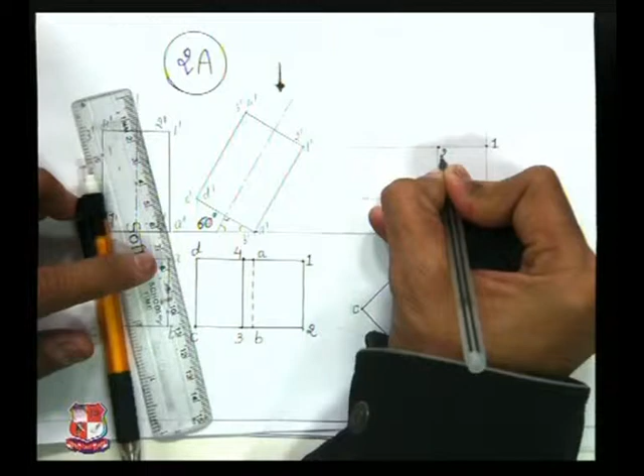For point number 3, from 3 draw a straight vertical line, that is the projection line from point 3, and from point 3 dash a horizontal line. So here is point number 3. Similarly, point number 4, vertical line from point number 4, which is over here like this, and horizontal line from point 4 dash, that is 4, in the front view.

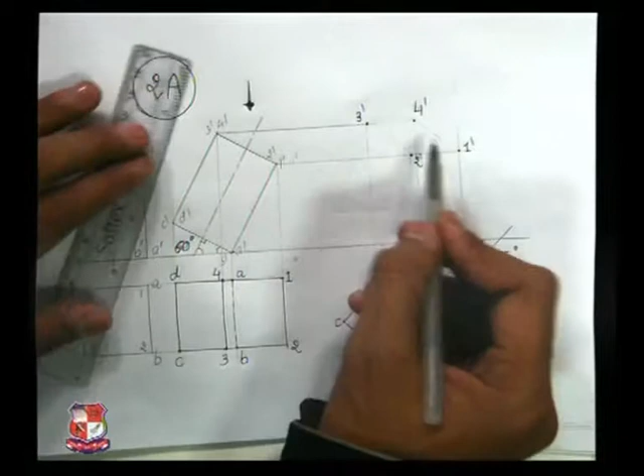Mark dash points over here. And if we are looking from here, the 1 2 3 4 face is visible. Again, the 2 point is towards us, so it would be visible. Hence this 1 2 3 4, or 1 dash 2 dash 3 dash 4 dash, would be fully visible. That we join with the full line like this. That is 1 dash 2 dash 3 dash 4 dash. In front view it would be fully visible.

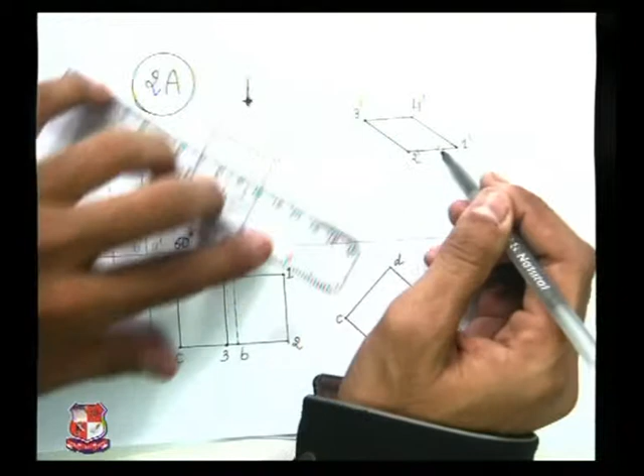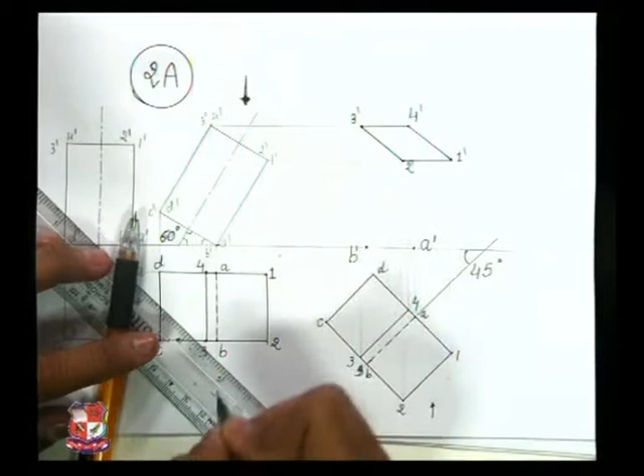Think about this base A B C D. So point A, from A draw a straight vertical line, and from A dash a horizontal line. So point A dash would be here. From B vertical line, from B dash horizontal line. Point B dash would be here. From C straight vertical line, from C dash horizontal line. Point C dash would be here, and from D, which is over here, draw a straight vertical line. From D dash horizontal line. So here point D dash would appear.

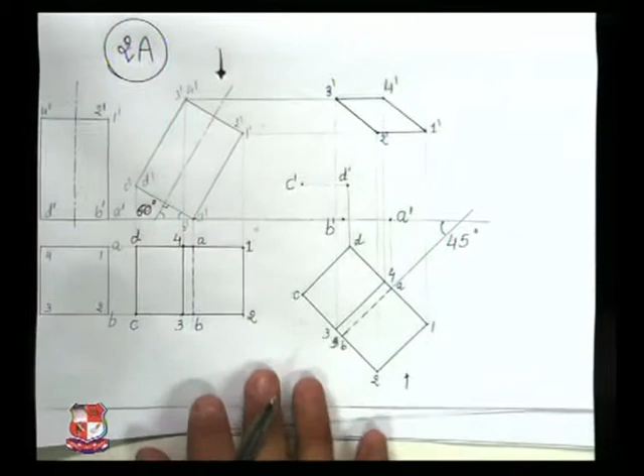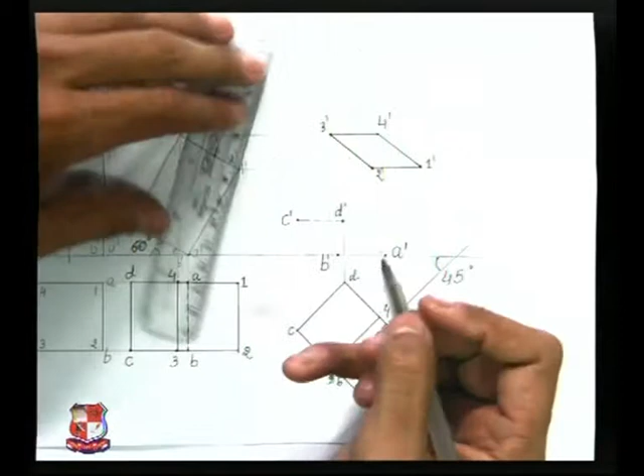So we have identified 4 points of the base, A dash, B dash, C dash and D dash, and D point is much away from us. If you look from here in top view, D point is much away, so D point would not be visible. Hence D point should be joined with the rest of the points with a dotted line like this, D to C with the dotted line, because it is away from us, hence it will not be visible. D dash to A dash would be joined with the dotted line. AB is an outside line, so it is to be joined with the full line. Again B dash C dash is also an outside line, so join with the full line. So 2 bases we have drawn.

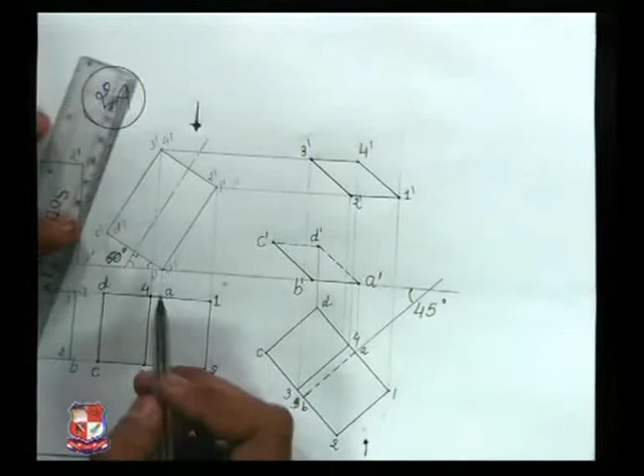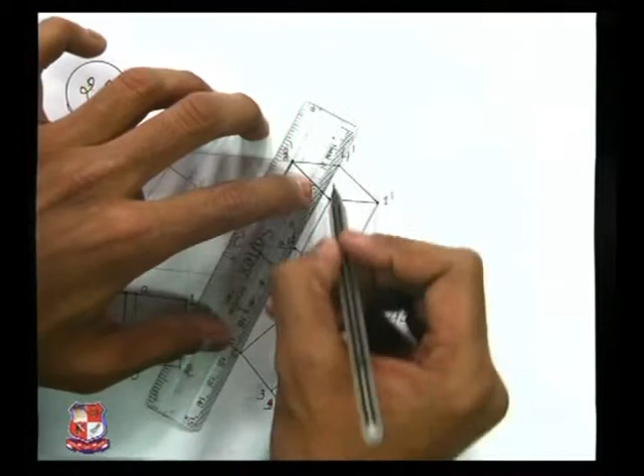Now think about the edges, that is A1, B2, C3 and D4. So A dash 1 dash edge would be visible, it's an outside edge. C dash 3 dash edge is an outside edge which is visible. Now B and 2 points are visible, hence they should be joined with the full line, and this D dash point is invisible, so that edge would also be invisible. So this is the view of the square prism, and this is the final answer of the given data.

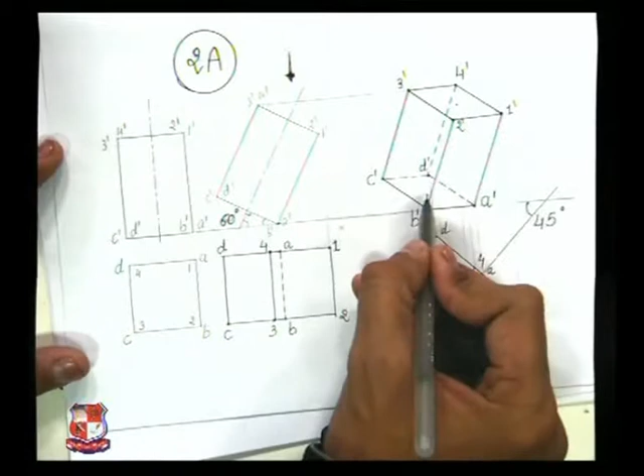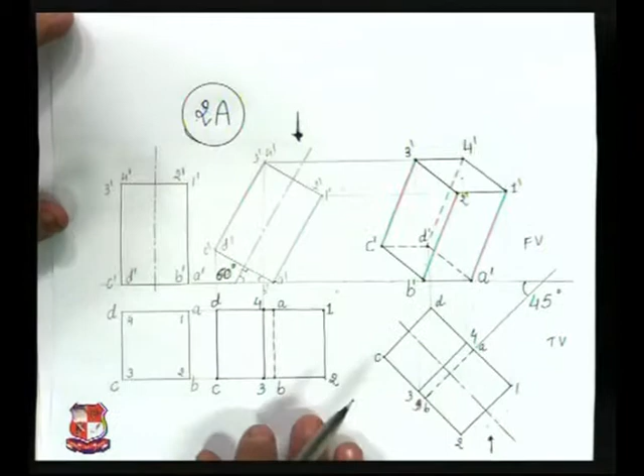If the prism is tilted 60 degrees with HP and 45 degrees with VP, its view would appear like this. Here also you can draw its axis by taking centers, and the axis could be represented like this, one long dash, one small dash and so on, and you write the answer. It's the front view, it's the top view, and right here 2A with a big letter, because in drawing students many times forget to write the answer number. You either write answer 2A or only 2A, then it will be visible, and this drawing should be very clear to get full marks in the examination.

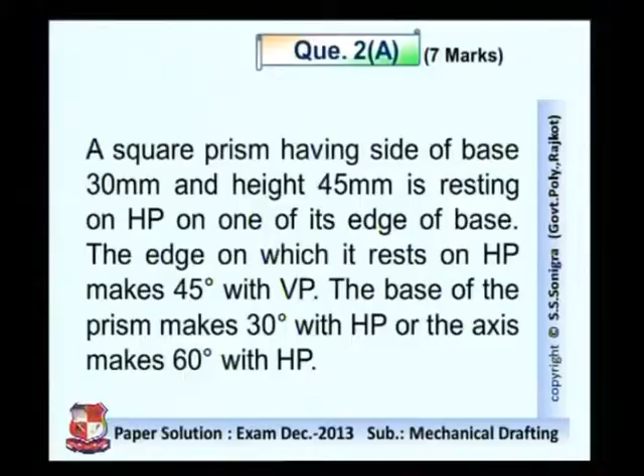So this is the solution of the problem which we have drawn. You can see here this square prism is given, which makes an angle of 60 degrees with HP. This axis makes an angle of 60 degrees with HP, hence this base will make an angle of 30 degrees with the XY line. After drawing this view, we took projection and drew this top view. Then it is given that the edge on which this prism rests, this edge AB, makes an angle of 45 degrees with VP.

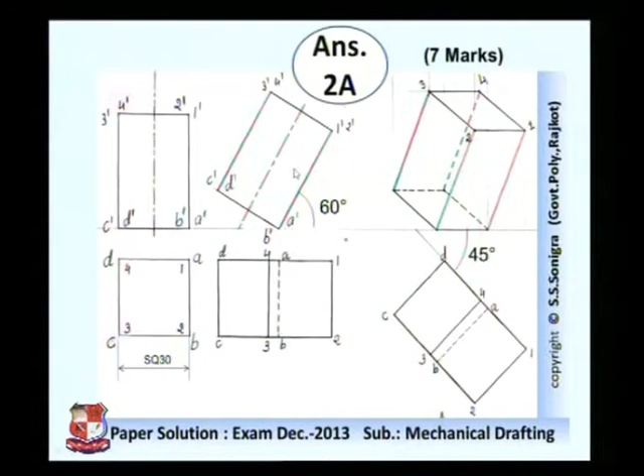So we have to tilt this top view in such a way that AB makes an angle of 45 degrees. So this AB makes an angle of 45 degrees. Redraw this by taking projection. This is the final view. So this problem is asked for 7 marks, 3 marks for this, 2 marks for this, 3 plus 2 is 5, and 1 for each of these. So 7 marks would be there.

Next problem, a hexagonal pyramid having side of base 35 millimeters and height 45 millimeters is resting on HP with 2 sides of base perpendicular to VP, and is cut by an auxiliary inclined plane inclined to HP by 45 degrees.

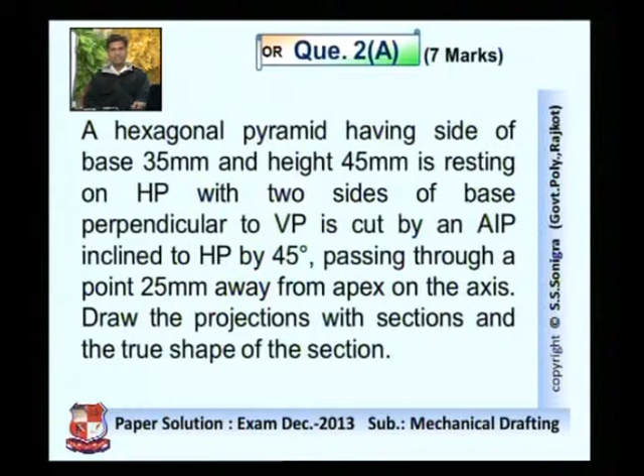Passing through a point 25 mm away from apex on the axis. Draw the projections with sections and true shape of the section. Here a hexagonal pyramid is given to us. So hexagonal pyramid, and two sides of base are perpendicular to VP. Hence this would be its top view.

If we look from top, this would appear, because here it is given that these two sides are making an angle of 90 degree with XY line. So this is the top view and this would be the front view, and this is a hexagonal pyramid.

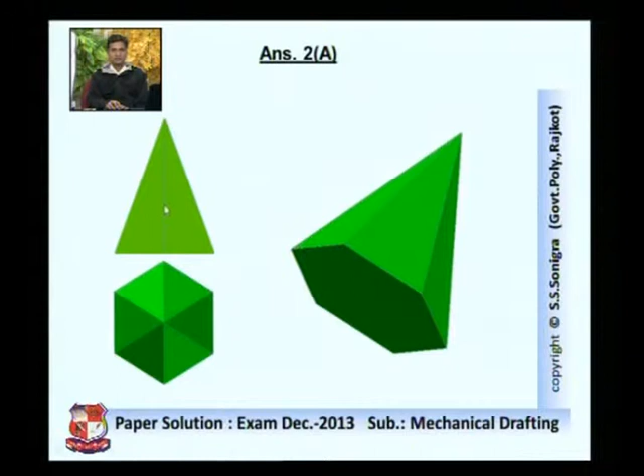In this problem, the cutting plane is given which passes through a point which is at a distance of 25 mm from apex. So from this apex at a distance of 25 mm over here, mark a point, and from that point an auxiliary inclined plane will cut this solid. So let me draw that problem over here.

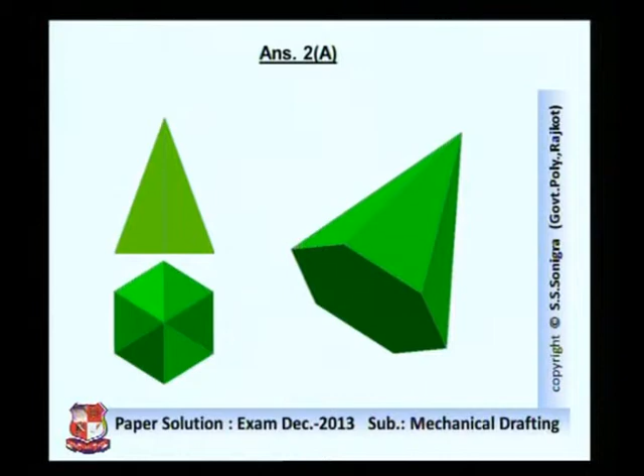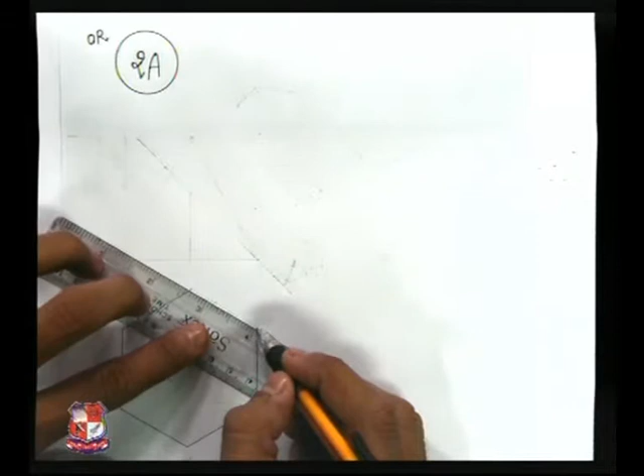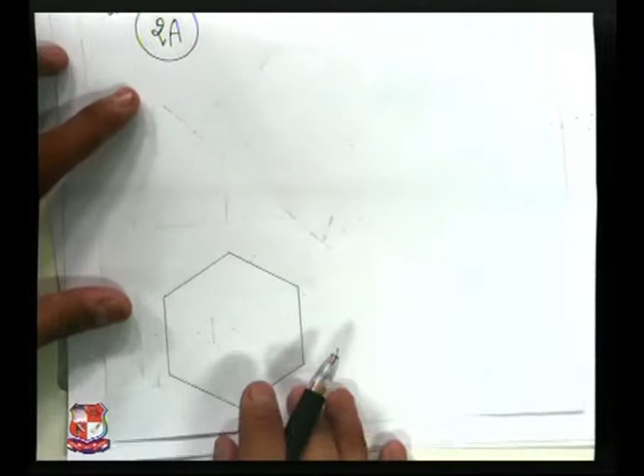We know how to draw a hexagon. By drawing a circle, you can draw a hexagon. The side length of this hexagon is given to us. So take radius equal to side length of the hexagon, draw a circle, and then draw straight vertical center line, and taking the vertical center line end points, this point and this point, as a center, cut arcs on this circle, and you can look at 6 points, and we name these 6 points.

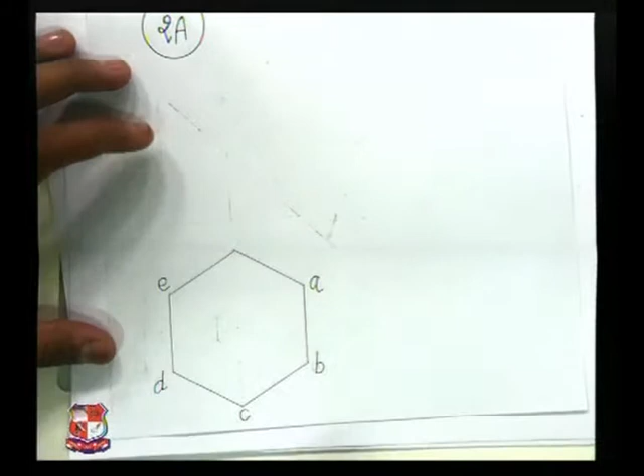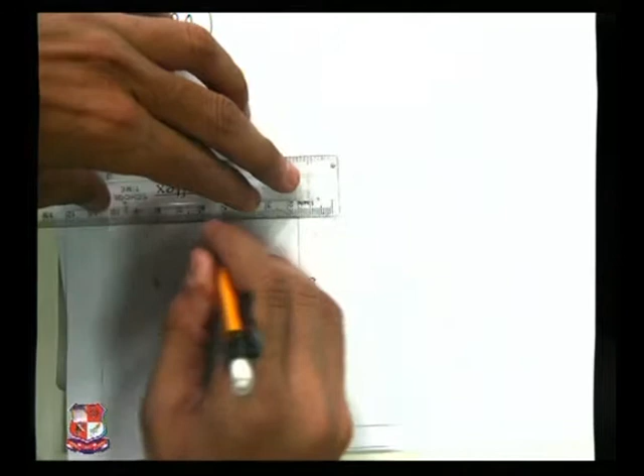Let me start from here. This is point A, B, C, D and E, end point of this hexagonal pyramid, and by taking projections from here we can draw its front view as well. In front view, its height is given to us. Height is 55 mm. So draw a triangle having height equal to 55 mm over here, and this is the axis of this solid.

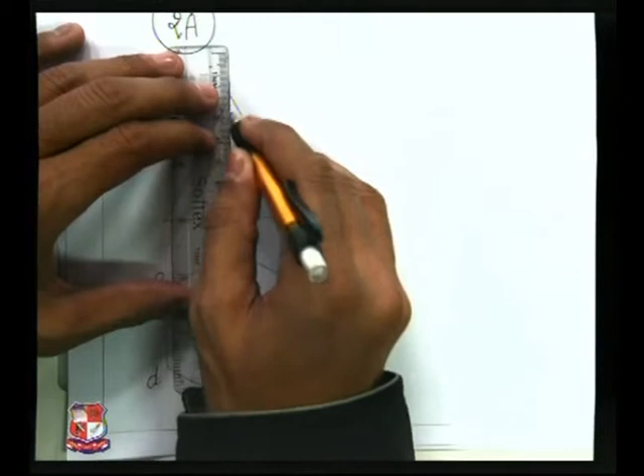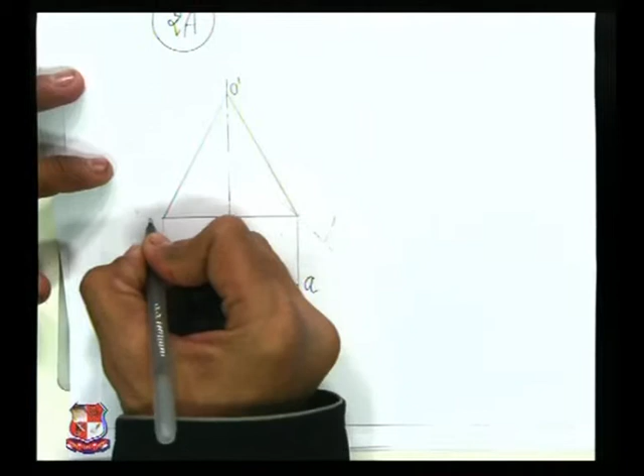You can show it over here, and here the edges would be fully visible like this, which will meet at an apex point O. This is apex point O. You can name them. This is apex point O dash. Here is point F dash and E dash. Here is point A dash. Then again B dash, C dash, D dash, E dash and F dash. 6 points are there. So this is the given data.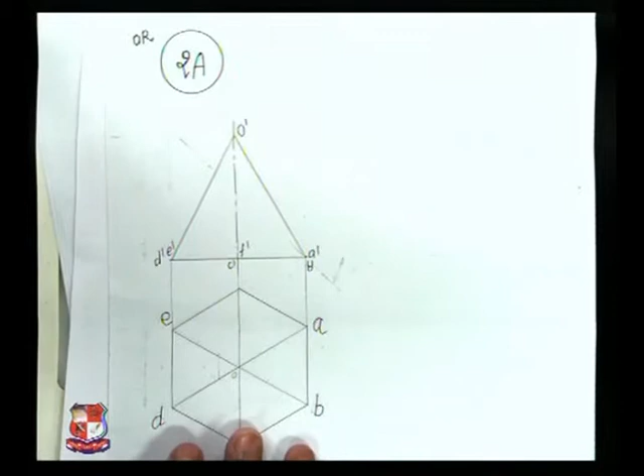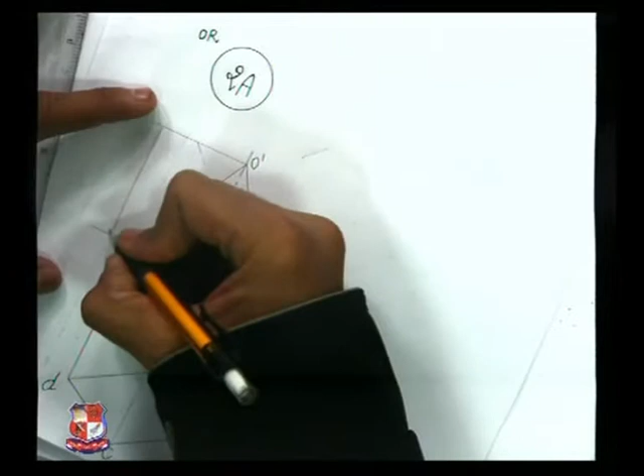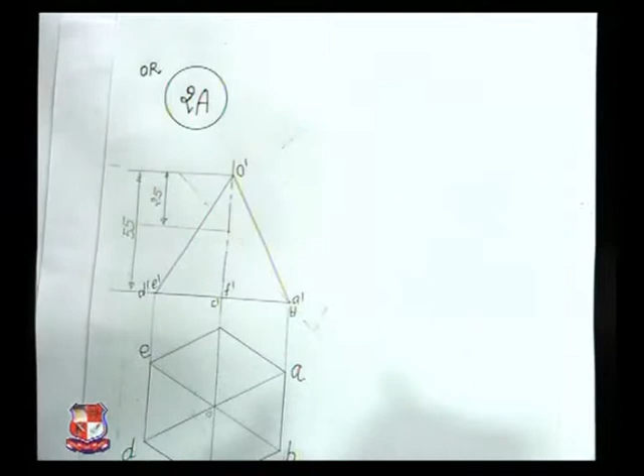You can insert the dimensions like this. Height is 55. This height is given as 55, and this height is given as 25 mm from here. So at a distance of 25 mm from apex, mark a point somewhere here. Here is the point. So from this point its cutting plane will pass, and that makes an angle of 45 degree with HP. So draw a cutting plane like this, which makes an angle of 45 degree with XY line.

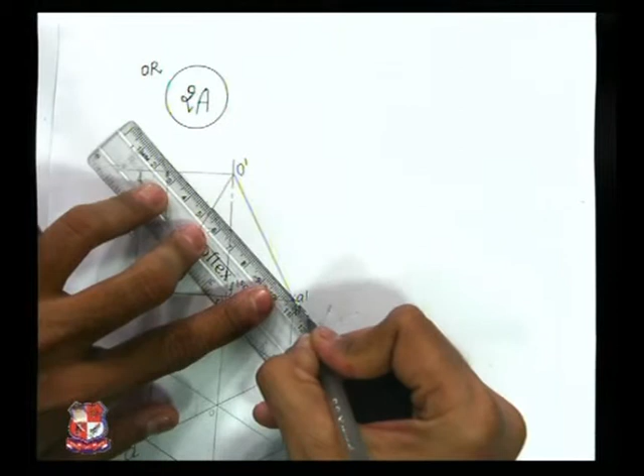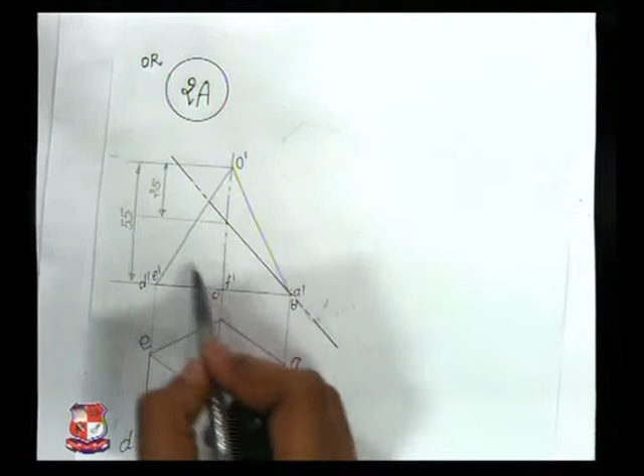So it would appear like this. This is a cutting plane. So cutting plane is to be represented by this symbol, 2 small dash and 1 longer dash. This is a cutting plane. Now after cutting this object over here, let me find out the points of intersection. Here 1 point, 2 point would be there. One is on A, another is on B.

So from here draw straight vertical line. 1 point is here, another point is here. 2 points we have identified. Now think about this point. Cutting plane is here and edges are here. OD and OE, 2 edges are here. So here 2 points would be there. 1 point is on OD.

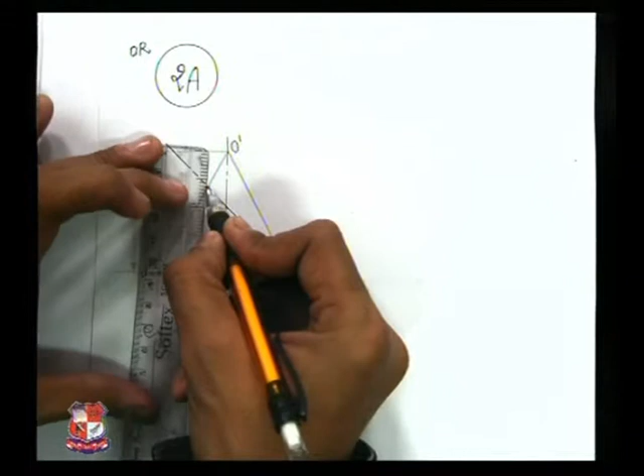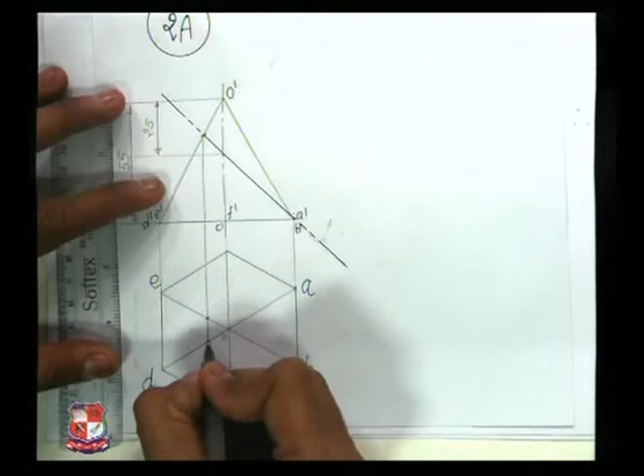So from here draw a straight vertical line like this. 1 point would be on OE and 1 point would be on OD. So mark here the point on OD. 1 point is here. On OE, another point is here. So we have traced 2 points.

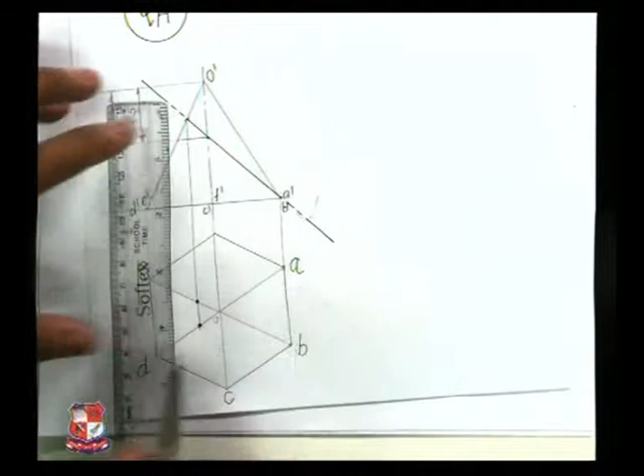Now think about OC and OF, which are cut by this cutting plane at these points somewhere here. So to find out the position of this point, let me draw a horizontal line from this point on this side, then vertical line, means we have to transfer to the true length of this pyramid. So for that, let me draw its true length. So for that again we have to do some more exercise.

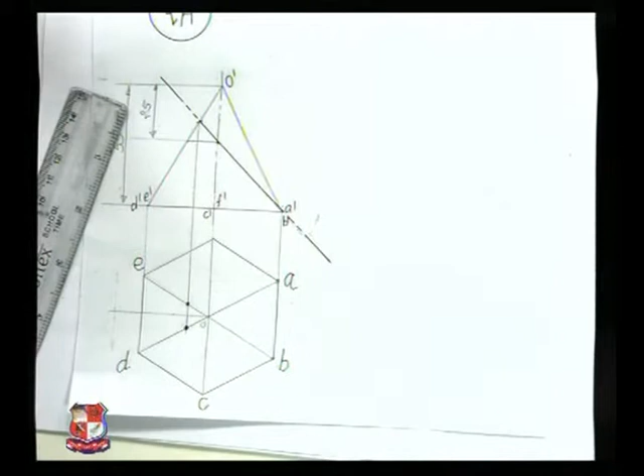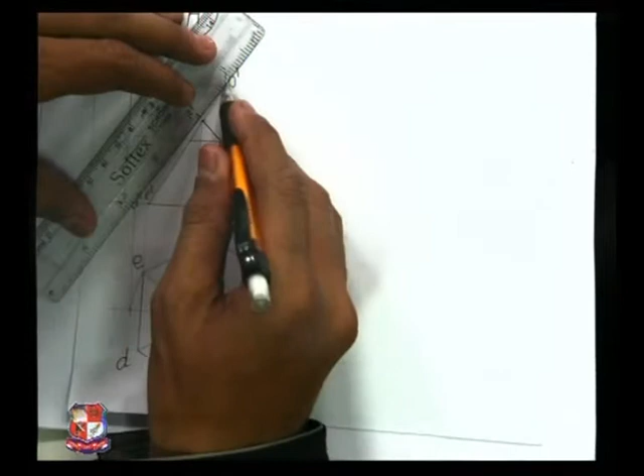So for that, from O dash draw horizontal line, and here make this OE parallel to XY line like this. Take O as a center, OE as a radius, draw an arc on this side, and this arc will cut over here. So after making this OE parallel to XY line, we can find out the true length of this edge. So this line represents the true length of the edge.

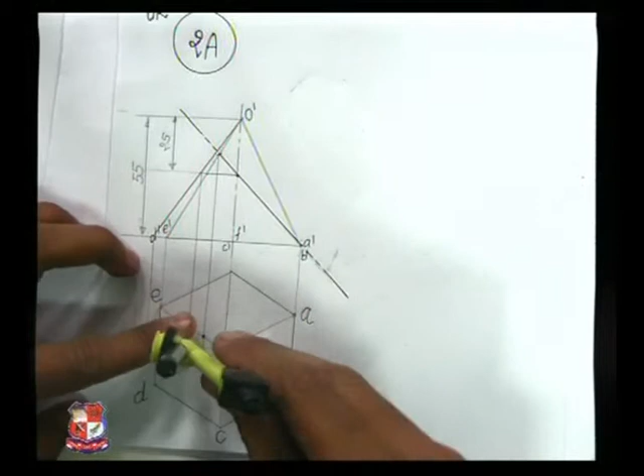Now on this true length, transfer this point. So that will cut this arc over here. From this point, draw a straight vertical line over here, and from this point, taking O as a center, O to this point as a radius, draw an arc on both the sides. One is on this side, another is on this side, and that will cut one point over here on OF, and on OC one point is here.

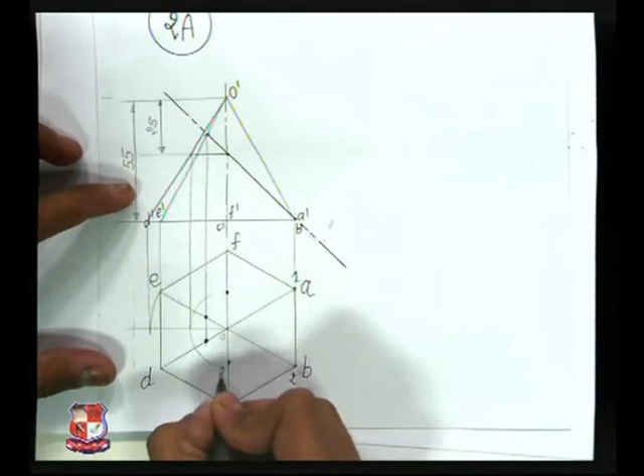So we have identified point number 1, point number 2, 3, 4, 5 and 6, and join all these points with a straight line, as it's a regular straight edge pyramid. It's not cone or cylinder, so we have to join all these points with a straight line as shown over here.

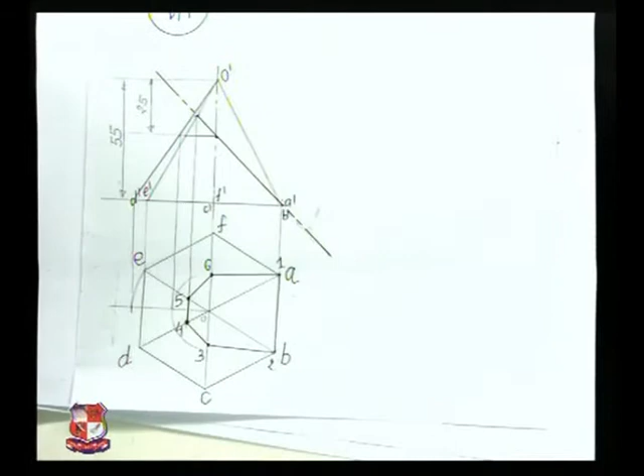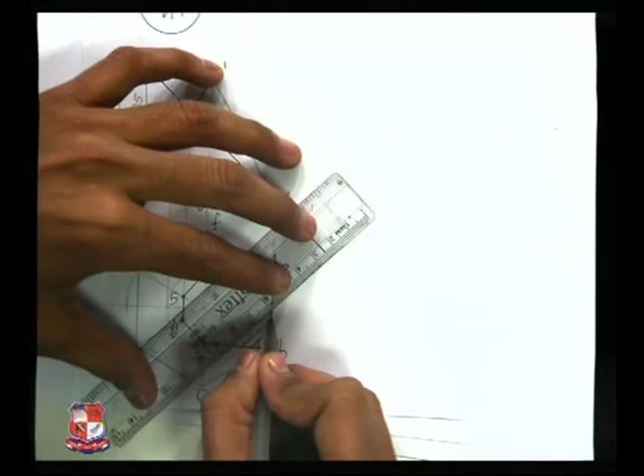And here in this portion, a sectional view is there, so intermediate lines should be erased and section lines should be drawn in this portion like this. From the 1, 2, 3, 4, 5, 6 closed figure, draw section lines or hatch lines. They are equidistant with each other and making an angle of 45 degrees with the XY line.

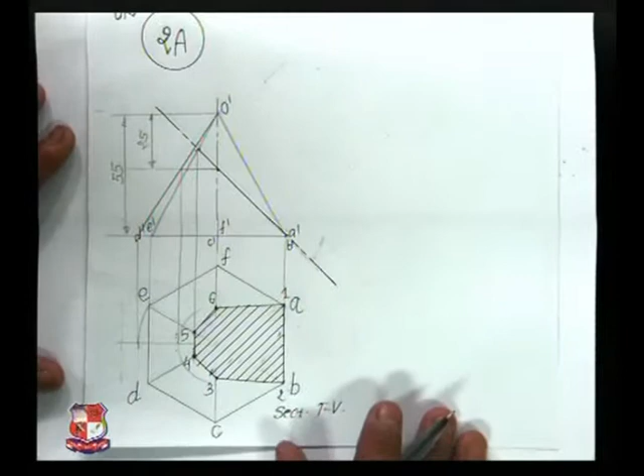You can write here the name of the view. It's a sectional top view of the given data. Now we have to draw its true shape. Now to draw the true shape, what should we do? For that, from its front view, here in the cutting plane, the front view is here. Here points are there: 1, 2, 3, 4, 5, 6.

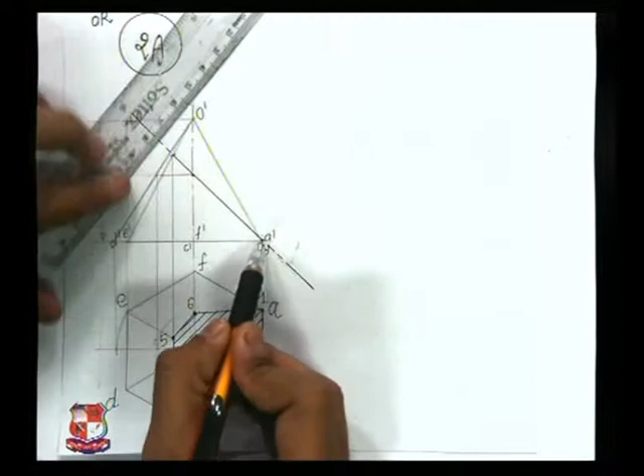So from these points, draw lines perpendicular to this cutting plane line from 1 and 2. Similarly from here, draw a line perpendicular to that reference line, and from here. So what we have done, here 2 points are there, 1 and 2. From that, we drew a line which makes an angle of 90 degrees with this cutting plane line. This angle is 90 degrees, you can see here.

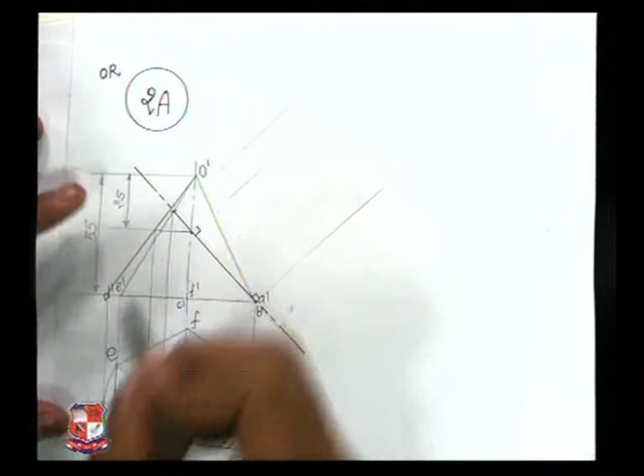Now measure the distance in the top view. Point 1 is over here, so measure the distance of point 1 from the XY line, this distance. From here, draw an arc, and that arc will cut that vertical line at one point, and this is the first point. Similarly, point number 2 is here, so measure the distance of point number 2 from the XY line.

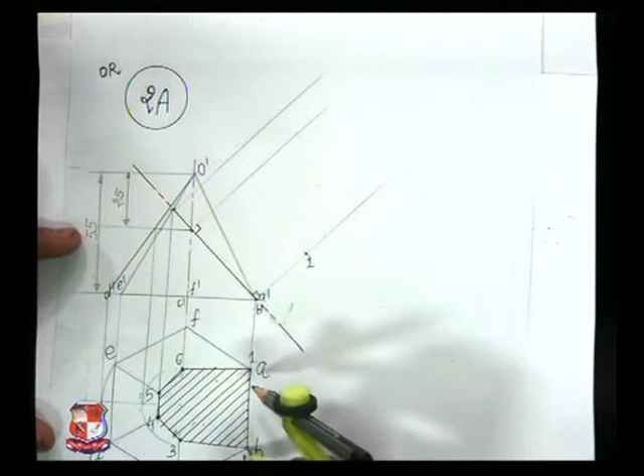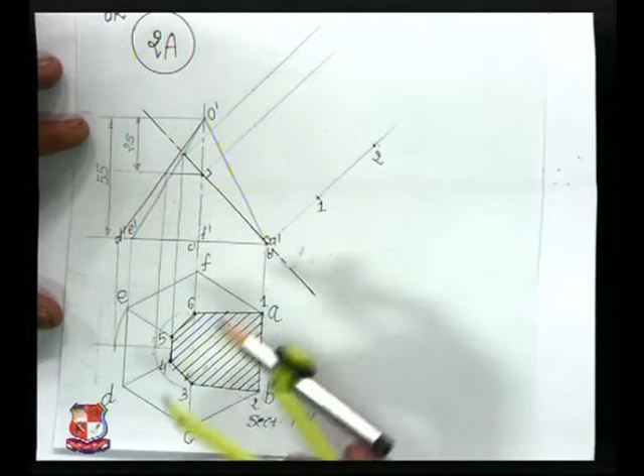This is the distance between point number 2 and the XY line. Take this point as a center and mark here point number 2. So point number 2 would be somewhere here. This is point number 2. Similarly, point number 3, you can see here, point number 3 is on OC. In the top view you can see it, on OC point number 3 is there. On O'C', point number 3 is somewhere here.

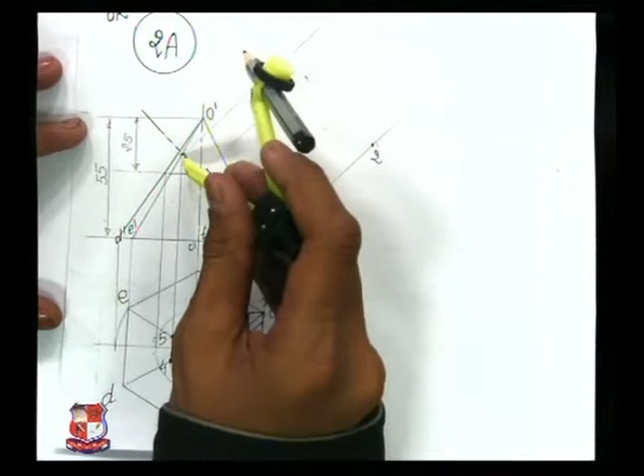So measure the distance of point number 3 from the XY line like this and cut on O3. Similarly for point number 6, 6 to XY line, and here. And similarly for 4 and 5: 4 to XY line, measure this distance, and 5 to XY line, and here. So locate all these 6 points, 1, 2, here is point number 3, 4, 5 and 6, and join all these points with a straight line.

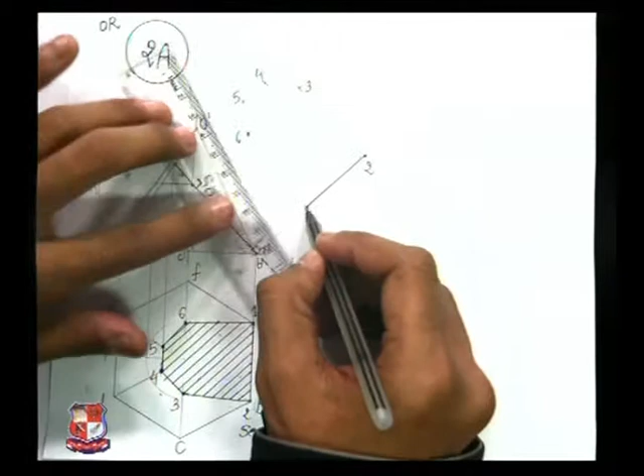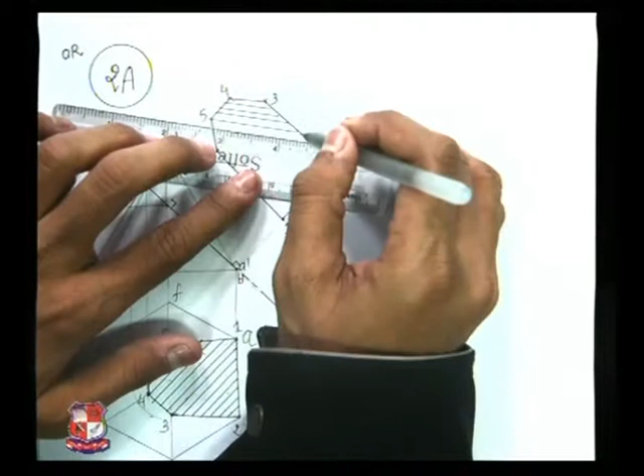So it would be the true shape of the section. If you look perpendicular to this cutting portion, it would appear like this, and in the true shape also it is a practice to draw section lines at an angle of 45 degrees with the reference line, not the XY line. In the case of this true shape, the reference line is this cutting plane, not our intersection of HP and VP. So the angle between these section lines and the reference line should be 45 degrees.

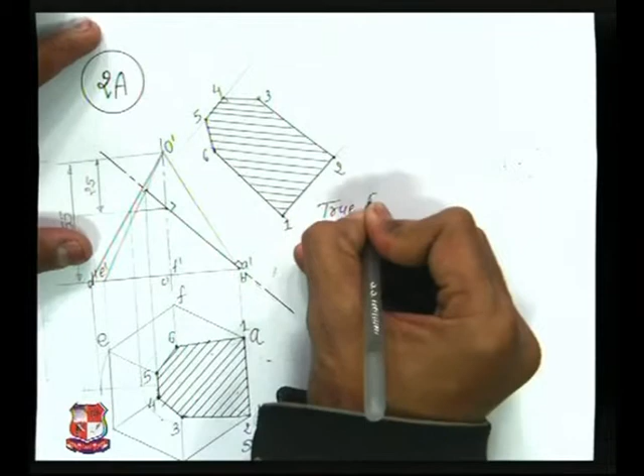You can write here, this is the true shape of the section and this is the front view, and this is the answer of the given problem. You can see here, height, from height at a distance of 25 millimeters, mark here the dimension 25, this is 55. This is a hexagon having side length 35 millimeters. You can insert the dimension of the hexagon like this, HEX 35, hexagon 35.

Show here these arcs. This arc is drawn to find out the true length of its slant edge, that is to be drawn lightly, and this arc also should be drawn to represent that you have traced this point in the correct way. And this portion which is the cut portion should be drawn much lighter, or you can erase that portion, and this is the remaining portion which is drawn brighter. This angle is 45 degrees, which is to be inserted in the diagram. This is the true shape, front view and sectional top view.

And students forget to insert the dimensions, to write the names of views, and to write the answer number. So take care about this, and this is asked for 7 marks. So 3 marks for this true shape, 2 marks for this front view, and 2 marks for this sectional top view. So we stop here our today's discussion, and we will continue with the solution of the same question paper in the next session.

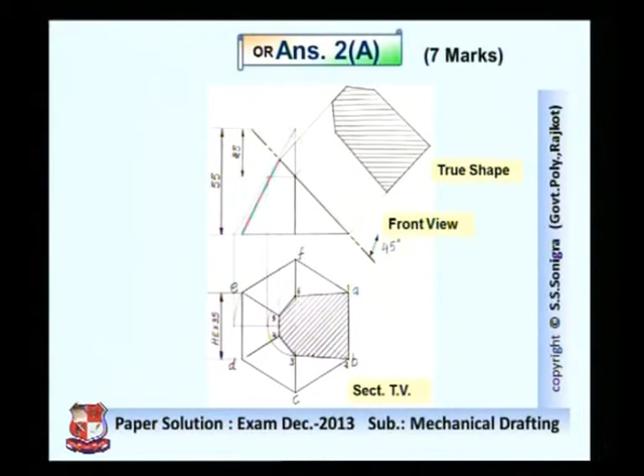Today we discussed orthographic projection, 3 views of the object. Then after that we discussed the projection of solids, that is the square prism, and then the section of the hexagonal prism, hexagonal pyramid, that we have seen here.